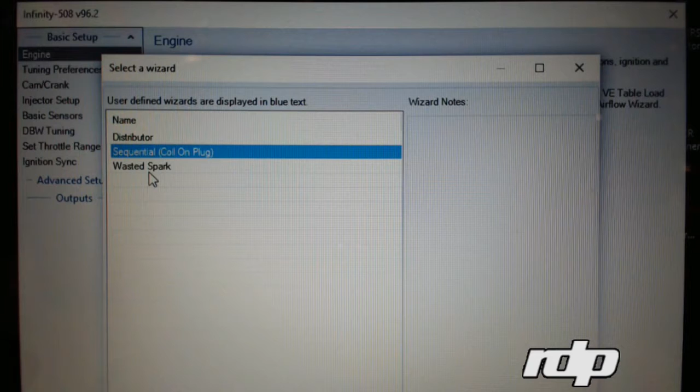And wasted spark, which is like your 525 Mercruiser. It has 4 coil towers with two pins on each one. So basically, one coil fires 2 cylinders. So you can make that choice right there simply through the computer.

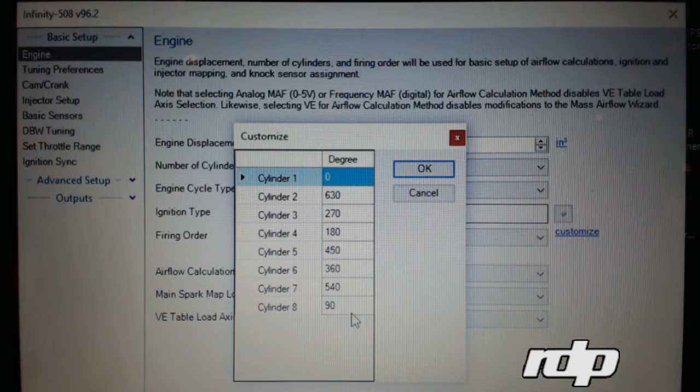Moving right along into the firing order, you can pull down the drop screen menu here and you can choose several different firing orders. And of course, if you wanted to, you can customize your own firing order by simply going to the cylinder and setting the degrees in which they fire for an 8-cylinder. We've pulled up an 8-cylinder basic map if I didn't explain that before.

So moving right along to airflow calculations, a lot of people use volumetric efficiency, and there's several other options here, but most of the time new users will use the VE type tuning, which makes it easier and simple to follow. When you go into the main spark map and load axis, a lot of people use MAP, which is load, and they use it in kPa.

Some people will flip to barometric pressure if they're used to PSI and vacuum. A lot of the other brands only allow the kPa and don't use barometric pressure. This one gives you a little bit more of options for that, and some of the other brands do as well. If you use the VE table load axis selection, you can basically change any of the axes on any of the lines in any of the maps by simply choosing your choice of how to tune.

Now, if this is your first time, I recommend just using kPa on here and kPa on here for both your load and your VE. That just keeps everything in order for you to get a basic understanding of how to tune your engine.

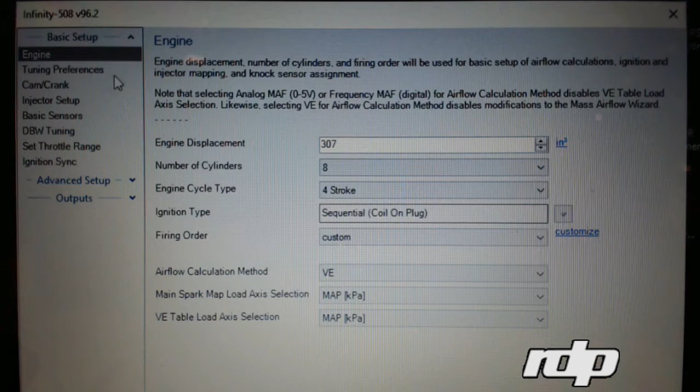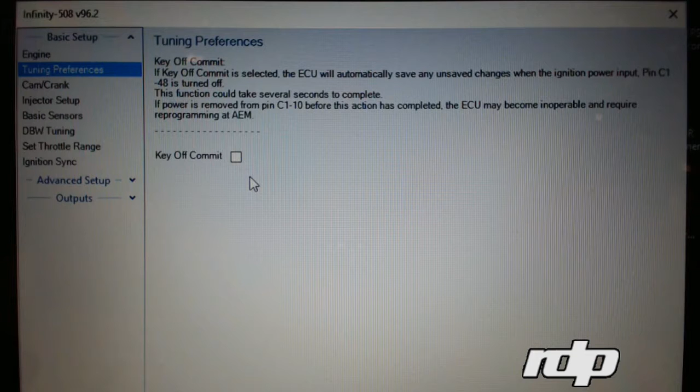Alright, so we're going to go back over into the next step here, which is tuning preferences. This basically says when you turn the engine off, do you want it to upload your changes? I usually leave this checked off. I want to save it and upload it at will. The only thing good about this, if you check this box, is if for some reason you stall the engine or something and you didn't save it on your computer and the power goes bad all at once, it might be an option for you to check, but not too big of a deal there.

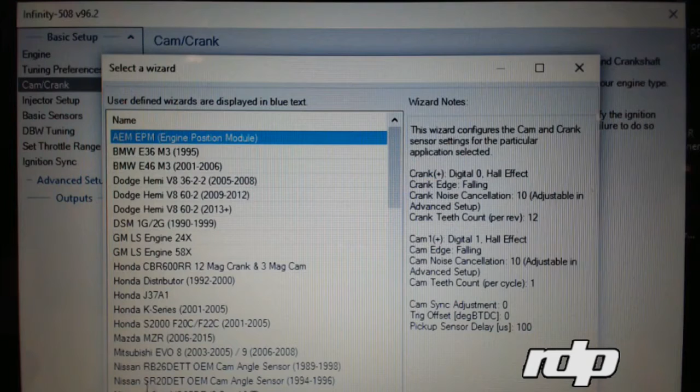But going into the cam and crank, this is your ignition setup. So if you go to show details, you have a lot of options here. So for example, if you have the EPM unit, which is the AEM, it replaces the distributor and has a 24x signal in it, then you simply choose this. But if you look, there's so many options from BMW to Dodge to GM to Honda to Mazda, and it just goes down a huge list. All the strategies in here are already figured out for you.

So for example, if you wanted a 60-2 similar to an LS pattern, you can go over here and you can verify that your sensors and everything is set up. It says here 60-2, missing teeth. It gives you all the specifications so you can line up your wheel on your crankshaft. But there's so many options here. You just have to make sure you know your cam and crank signal.

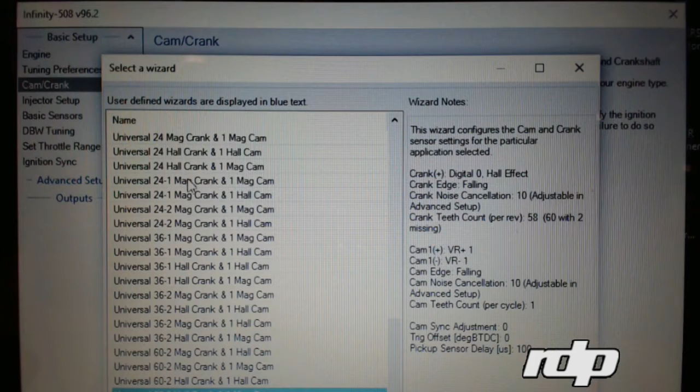And if you know your cam and crank signal and where it's located, you can get it real close by setting the basic cam and crank signal and then basically show the details, and you'll be able to set it up so the computer can see where your trigger wheels are set up. Now if you have a regular distributor, obviously you just choose like a mag trigger if it's a locked out MSD. So there's all kinds of options to set that up in this wizard area here.

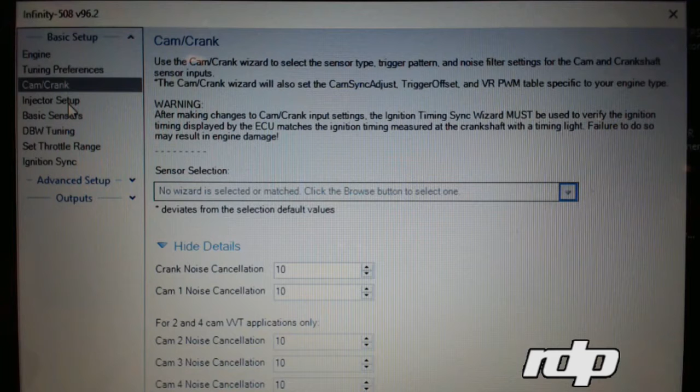Alright, so always stay simple with that. Don't go overboard. Just find out from your trigger manufacturer how many teeth you have, whether it's a VR signal or a mag signal or whatever it is, and then it'll be very self-explanatory there.

Alright, so when you go into the injectors, for example, it says primary fuel pressure reference. So that means, do you have a fuel pressure regulator with a hose going to the manifold, or do you have an open hose going to just atmospheric pressure? So the computer wants to know basically if your fuel pressure is static, say at 50 pounds, or is it going to be moving around based on vacuum, which changes the way the injectors pulse.

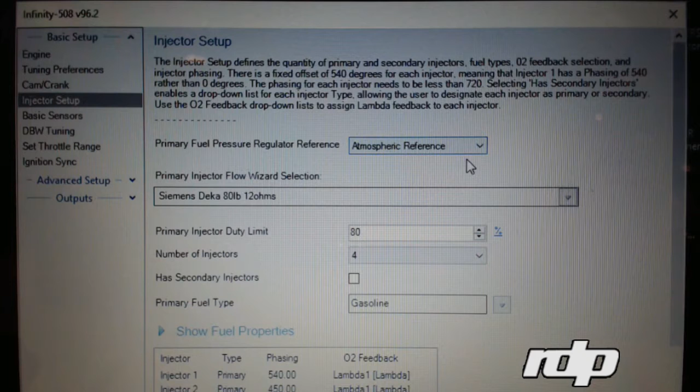This actually has the ability to calculate based on vacuum how much pressure is going to change based on a fixed position there in the ECU. So it actually calculates the richness and the leanness and compensates into the VE table.

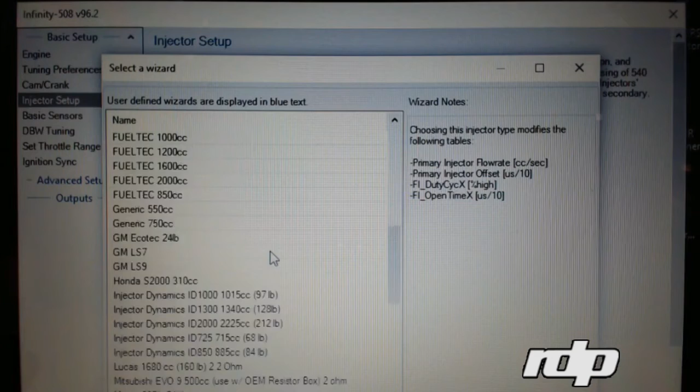All right, so if you look here, primary injector flow, so you can pick your fuel injector. Again, when you go to your receipt book of where you bought your fuel injectors, you can simply go and find out, okay, I bought a, let's just pick one, all right? Let's just say I picked an Injector Dynamics 84-pound injector. When you put that in there, it basically populates everything that the computer needs to know about that injector, and it tells it what its performance is. And you can look and see some of that information here.

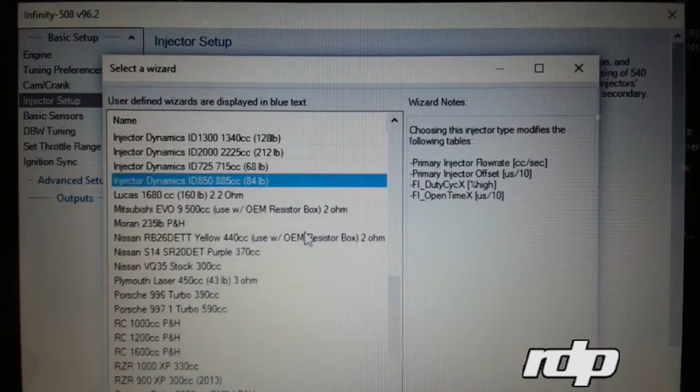And if you don't have one, then I recommend picking one that is as close to what you have spec-wise as possible. Talk to your manufacturer, and you can compare some of these brands with those and get it real close. Obviously, you'll be fine-tuning it in your engine when you get ready to fire it up. You'll be adjusting for that.

The other thing too is, this is your primary injector duty limit right here. What this means is no matter what, you'll be maxed out at 80% of your fuel injector's capability. It's a good rule of thumb to make your maximum at 80%, because if you go to 100%, sometimes the injectors go static, and when the injectors go static, it creates problems and they just start flooding the engine and you don't know what's happening.

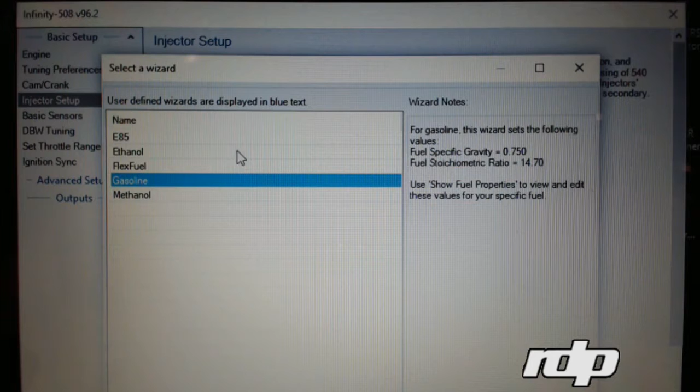All right, so this is the number of injectors. So this one says 4. Obviously, if you have 8 injectors, you put 8. Primary fuel type is gasoline. Now, if you want to run flex fuel, E85, methanol, it tells you here the difference in the stoichiometric ratio and the specific gravities for each one to make sure that you're calculating the correct VE for the basic startup of the engine. Kind of a neat feature there.

The other thing is phasing. So if you look here, it says injector 1 primary phasing. It's telling you where in the engine firing order these things are phased in at. So this can all be manipulated later on in more of an advanced setup, but usually if you just pick a V8, it basically has this standard sequence of events of when the injector is opening. Now you can change that in the software while you're running it on the dyno. You can turn the injector cycle on early, late, and there's a lot of hidden horsepower there if you get to that level. But this is just a basic area here that shows you that.

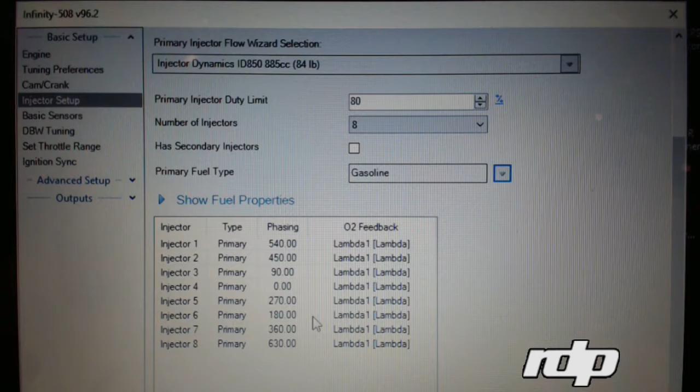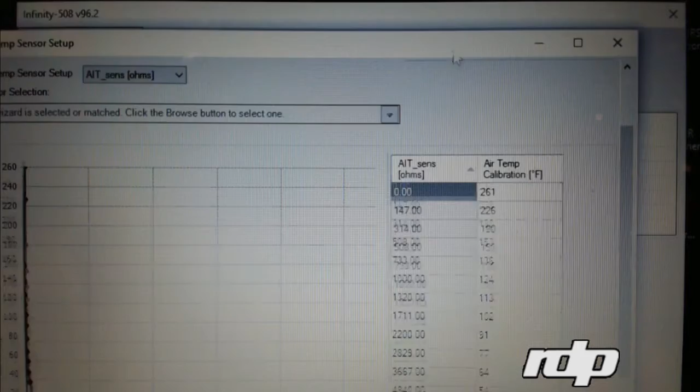All right, so moving into basic sensors. So what you want to do is, again, you must go back to your receipt book and say, okay, what air temperature sensor do I have? So you double click on that and you basically look here and it gives you a graph of how the sensor works. So let me move this up a little bit. You see the graph? So it's telling you how that sensor's set up, and these numbers here are basically each position.

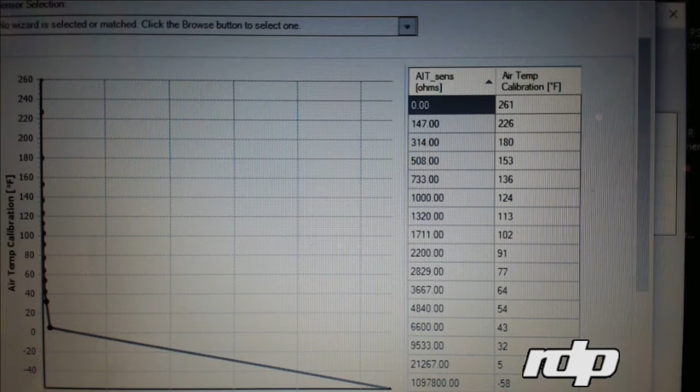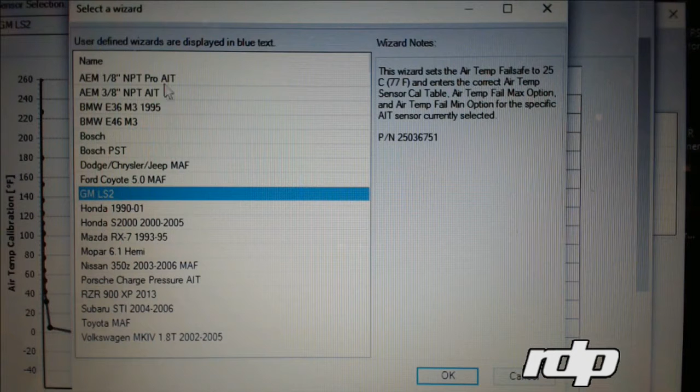So if you pick like an air temperature sensor from GM or AEM or whoever makes it, there's a drop down menu again. So say you have a Toyota sensor, it's got the information, or the LS2 GM, you double click on that and they have it populated already here, so you don't have to do anything. We already know the statistics of that sensor. Especially if you use the AEM brand, it shows this curve and all the numbers are here, and that's all you have to do, and then simply close that part of it and then go to the coolant temperature sensor.

When you go to the coolant temperature sensor, it's the same type of thing. You just literally pick what it is that you want, and you can adjust these numbers and you can change the curves around to make it suitable for your needs for each sensor. Same thing with the map sensor. You double click on that and you can pick what type you're using.

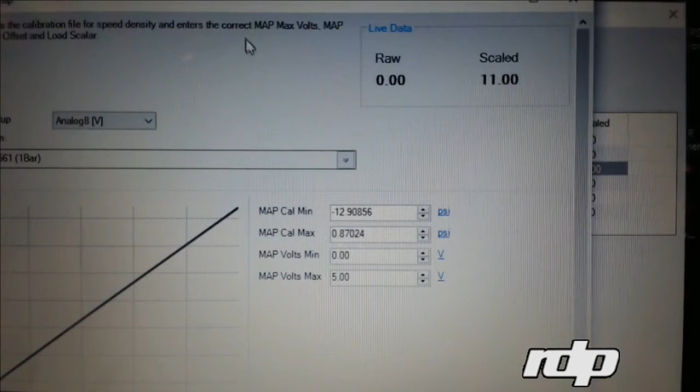So this one is very important. This one is set up for a GM single bar map sensor based on its part number right here. And if you just hold the mouse right there, it's basically telling you what it is. It says it sets the calibration for the maps and it gives you the spec. Now, you might have a GM 1 bar that's something else. There's another one here. There's another one here.

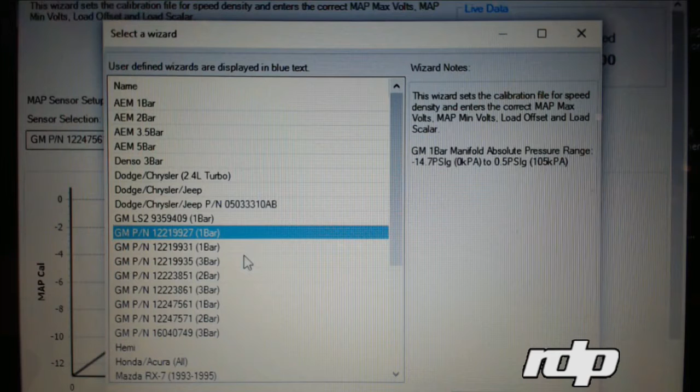There's several of them. A lot of people think that the map sensors are all the same, and they're not. They're definitely different. A lot of the GM sensors, they can be plastic and look the same, but they actually have a different curve. So it's really important to look, when you double click on this, you need to check this curve out and make sure these numbers are correct for your application.

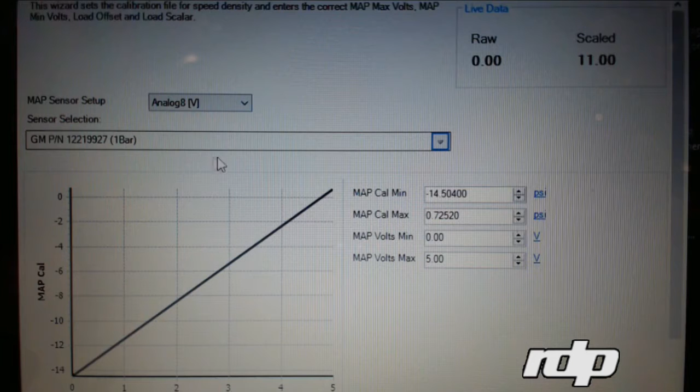So don't just assume because it's a plastic sensor and it's a 1 bar that it's going to act the same. A lot of times people change sensors on a stock motor and they go to Napa and they buy a single bar map sensor from some Buick and they think it's going to work on their motor and they end up exploding it because at 3,000 RPM it's a 1/4 of a volt different input to the computer and it runs lean there. So be real careful with that. It's really important to get this set up properly.

Alright, so let's get out of there. Let's see. We're going to go back into this tuner here. We gotta make a couple adjustments here. Alright, so what I'm going to do is reopen a different part of this software so we can see it a little bit better. And let me see if I can show this to you.

So again, when you're looking at certain things on the fuel, basically your VE table, like this is in negative vacuum and positive. It's in map PSI. So if you change this to KPA in the wizard, this all becomes KPA. So you have to be familiar. Like if you're a new EFI user, you may understand that this is 0 and 1 pound of boost, 3 pound of boost, 4 pound of boost, whatever. Where if it's KPA, you may not understand it. So there's a lot of ways to play with it.

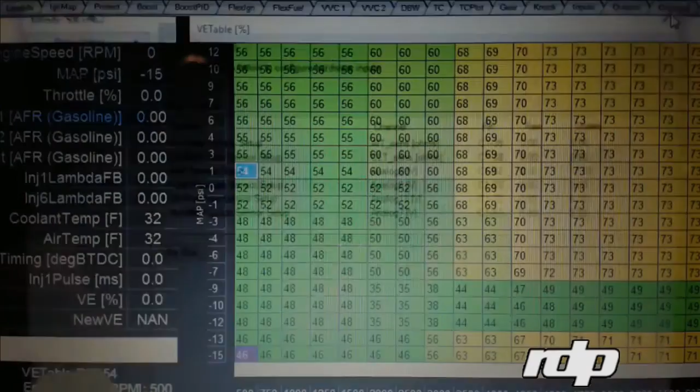But basically your idle range, and when you fire it up, if it's lean or rich, you can simply highlight a section like this and then simply move the map up and down. So I kind of wanted you to see where that wizard applies for setting up the sensors and the injectors. So I hope you understand that. When you set up the injectors and all this stuff here, if you click out of this, what I was trying to show you is this section here is where

your fuel is. And if this section is where your fuel is and you're running and idling, you can simply just hit the minus or plus button till you get the engine running. And what that does is it manipulates that injector pulse. And once you manipulate the injector pulse, you can home in on that air-fuel ratio for your injectors. But try to set all this up right.

All right, going back to the fuel pressure sensor. A lot of people don't run these, but we do, and we like to be able to know what the fuel pressure is doing. So you can minimize this, and again, you can put your calibration minimum, maximum, or for the first time users, you can just pick a sensor. This one's set up for an AEM 100 PSI sensor. Comes with a lot of Whipple kits and a lot of supercharger kits out there, and you have the ability to change it to whatever you want.

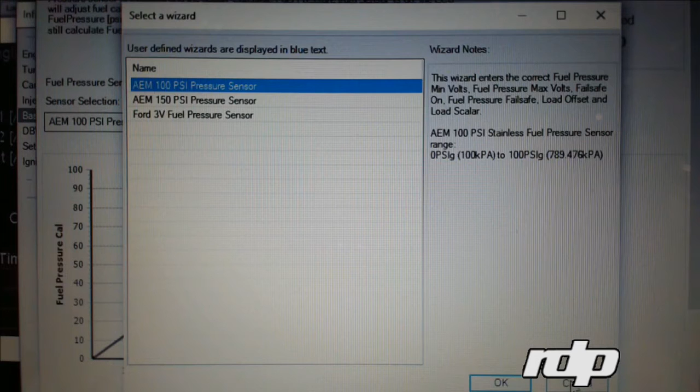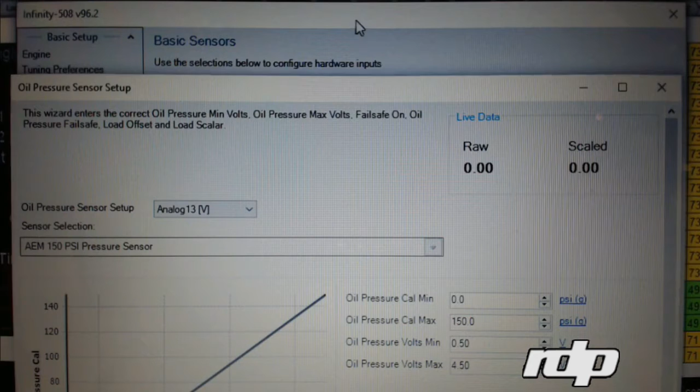Or if you don't see one and you know what these specs are, you can basically call it an AEM 100 PSI, but it can be anything. So the ability to change it on the fly and do whatever you want is a big benefit. So that's kind of a neat feature there. Same thing with the oil pressure sensor. You can take the oil pressure sensors and move them around and do the same type of thing. This one's set up in a certain range. So that's pretty basic.

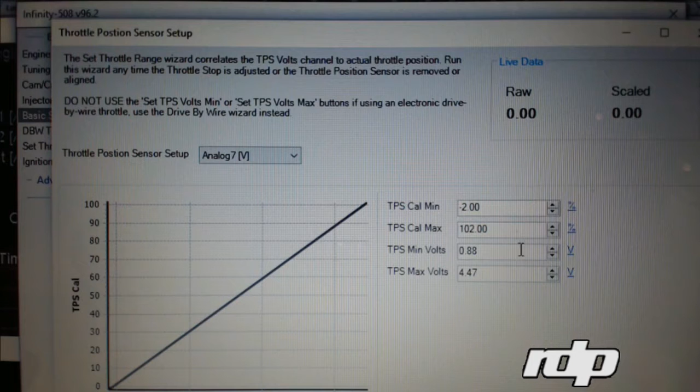When you set up and key on, you need to see what the voltage is when the thing's at idle, about where you think the throttle position would be. That way you can adjust this if need be. But usually this is a good starting point that the wizards default to in most EFI programs.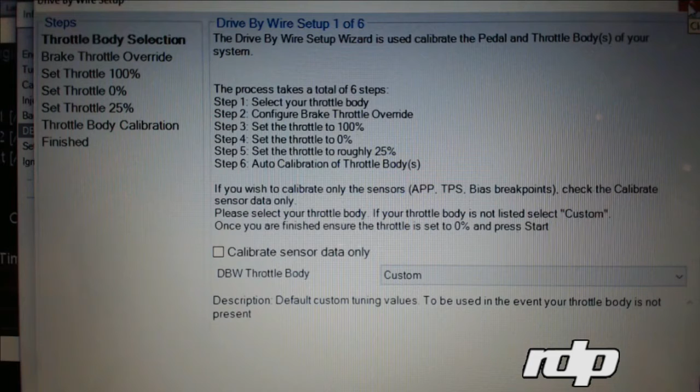All right, so this is for drive-by-wire tuning. Most of you guys are not using this yet, but basically this sets up the drive-by-wire calibrations in the engine here. So if you have no cable and just a drive-by-wire throttle body, you can go through each one of these setups here to make sure that when you start the engine it knows what it's trying to control as far as the drive-by-wire setup.

Alright, so if you look here, a lot of the newer EFI systems have this. It's a set throttle range. So when your engine's sitting in your boat or car or sand car or whatever it is, and you want to set minimum and maximum TPS voltage, you basically come into here, key your engine on, hit this button without the throttle depressed at all, and then it'll prompt you to go all the way to wide open and then set the maximum. When you do this, you'll see these numbers change here.

And what it's doing is it's saying, okay, we know this is the minimum throttle, we know this is the maximum throttle, and now this is our fixed range based on this person's vehicle, ECU, harness, and software. So it's very important before you try to start this machine that you set this up in the wizard with the key on, and when you're connected live to the ECU. It lets the computer know what range it's going to live in.

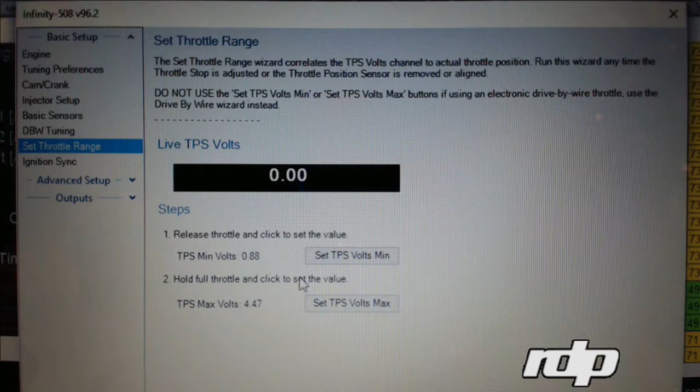So some of the guys forget to do this, and then they go do all this tuning and find out that they're way out of range and they got to start over. So please go through these wizards and basic setups in any of the software before you go to start the engine. Alright, the other one you got to know about is ignition sync.

So say you get the engine up and running. When you get the engine up and running, you want to do what's called an ignition sync. So you want to check this box, and this one says 15 degrees. What that means is that it's going to hold the ignition at 15 degrees. So say you're up and running and the air-fuel ratio is pretty close and you have no leaks and everything's cool and safe. You basically take the timing light and it should be at 15 degrees at any RPM.

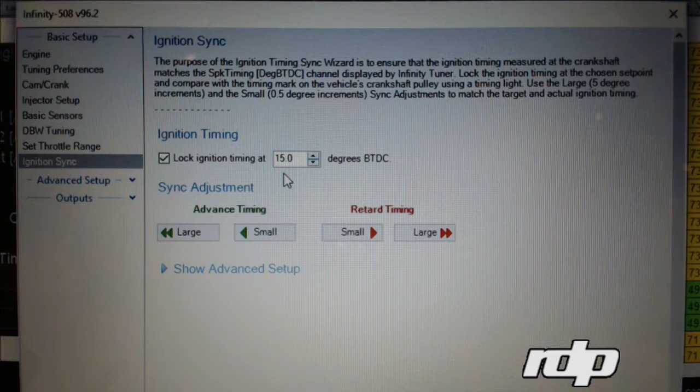It locks that distributor down. So at idle it should be at 15 degrees, and at 3500 it should be at 15 degrees. That way you can ensure that you're synchronized with the computer, with this number of 15 matching the timing light. It's really important that you synchronize this before you do any continual tuning. So get it up and running, put this in timing mode, check the timing and make your adjustments on any distributor or cam teeth or anything.

So if you go here, for example, say you have a 60-2 wheel, you can change the offset right here in increments to change the timing. Because you can't adjust the timing on a reluctor wheel on the crankshaft, but you can change the offset right here. So in this little area here, while the engine's up and running and idling, you can synchronize the timing.

And if it's fixed position, then you have to do it here by telling the computer that, hey, I'm off X amount of degrees, so I need to offset. Say you're at 18 degrees, you may want to offset this number up or down to get it in sync. Once you're done with that, uncheck the box and save everything.

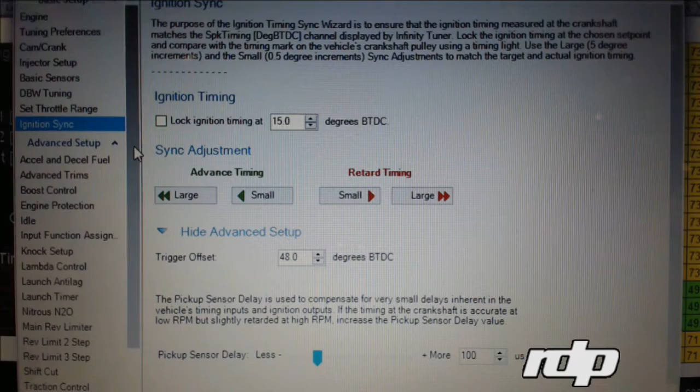That way you can make sure that all this adjustment that you're doing is ready to go and set up for your next startup and final tuning. Alright, so now we're going to go into the advanced setup over here off to the left side. You can see it right about there. So we did the ignition sync.

Now this is your acceleration and deceleration. Now most of this stuff is more advanced, and obviously we'll go into more depth about it at a later date. But basically in the accel decel fuel, it says here that you're going to be able to set your acceleration fuel by the throttle rate and the engine speed. But again, you can change it from coolant temperature, you can change it from the rate of change, you can change it from what the load is. So there's a lot of ways to adjust this.

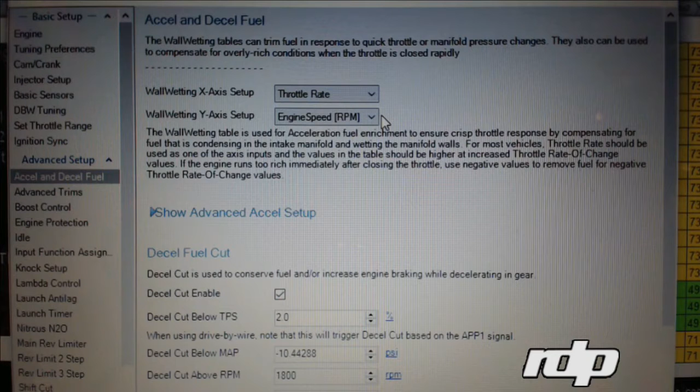I always think that the best way to start out on a new tune is throttle rate and engine speed. That way you can just basically feel out what the engine wants and get it crisp and clean accelerating there, and then move into any further tuning in the layouts.

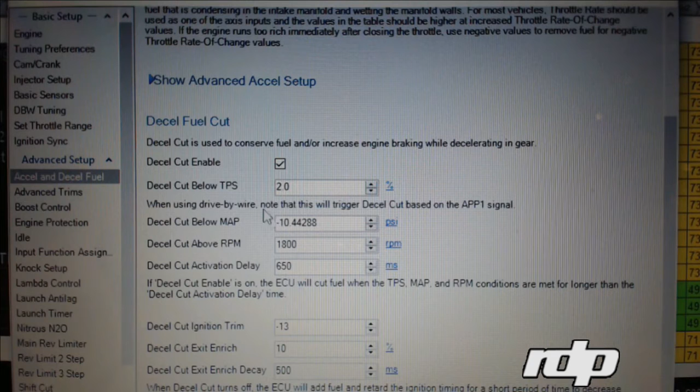And then over here you get into deceleration cut. So when you decelerate, this means that this box is checked, and when you're below 2.0% of throttle position, it's going to maybe cut fuel. So you could turn all this on or off. I always recommend leaving these at default in the beginning, and then once you think you have a pretty good tune on it, then you go in here and do what's called the advanced tuning.

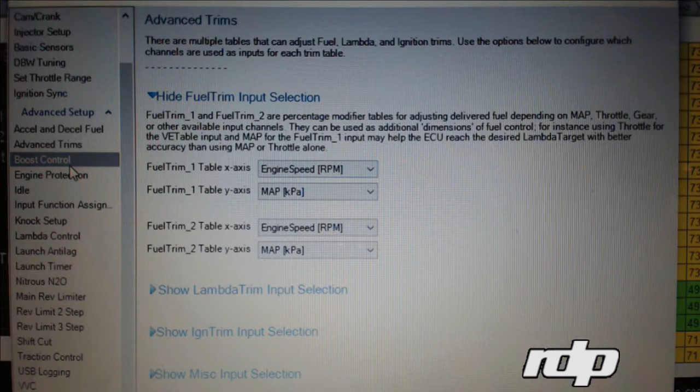So if you look at advanced trims, these get into all kinds of in-depth parameters that we will show you at a later date. This is more of the advanced session here with these drop-down menus, but I'll skip around and go to the basics for firing it up. Most of the guys aren't running turbos in the beginning here, but this is all your boost control. This is a hot one.

This is engine protection. So enable MIL output. That allows you to have a ground output to a light or your MerCruiser buzzer or whatever's existing on your boat. So you can check this box and have it work the same way. And then you can set maximum boost, throttle position, temperatures, lean, rich, however you want to input any kind of alarm into that output. You can do it right here.

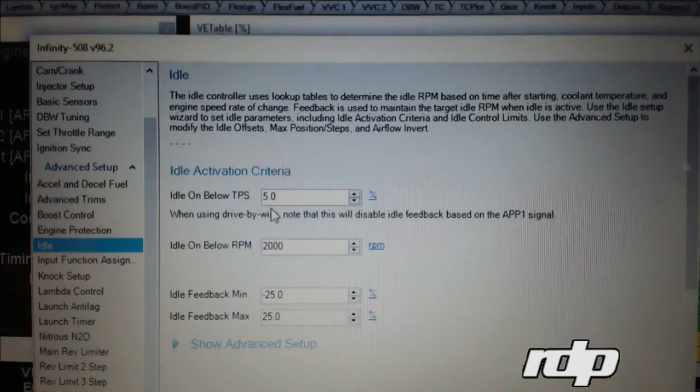When you look at some of these other spots here, it shows you like idle on below TPS. For example, if your throttle position is below 5%, it basically tells the computer you're trying to idle, so put everything into the 850 RPM range or whatever it is.

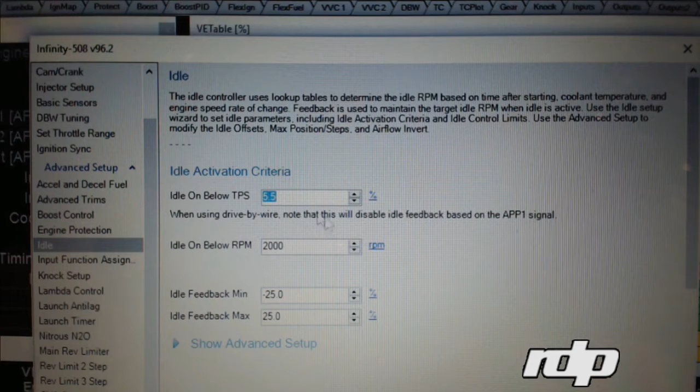So these are the type of things that you can manipulate. Say your engine wants 5% of throttle just to stay running, if it's like a 700 cubic inch something or other. So you've got to change this and move the number up to like 6 or 8%. This will happen after you get up and running. You'll see that you're not able to adjust too much fuel, and then you'll have to come back into the wizard and do more advanced things.

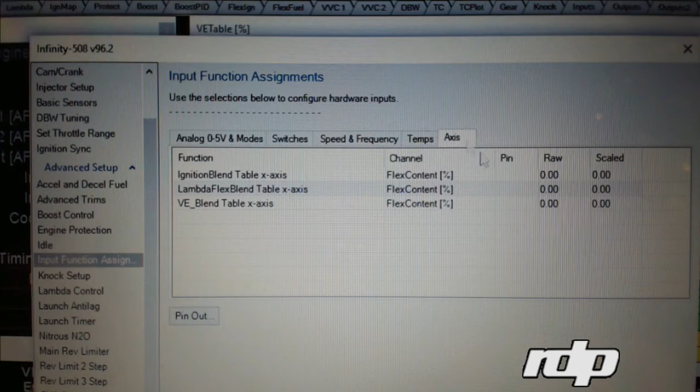The input functions, all these things are whatever you want to input into the ECU for any kind of change or modifications. There's switches here, there's speed and frequency, temperatures, and axis for tuning. So these are all custom tunable inputs, and there's also outputs.

This one here is pretty nice to put on, but I don't put this on until after it's tuned, because you don't want your knock feedback to start manipulating what you're doing on your base map. You've got to get the base map set up. So it's really important that you get the base map set up on these EFIs, and don't turn all these extra functions on until you get the basic engine timed, running crisp, revving crisp, idling good, or as good as you can, and have a stable engine that'll actually start and run and idle.

And once you get that going without your O2 feedback, in other words, have the oxygen sensor feed back the air-fuel ratio to you, but don't let it take over and make any adjustments. Do it open loop so you can get a good baseline, so if any of the sensors fail, the engine runs good.

That way it's not all of a sudden a disaster if it goes into a limp mode. So part of the thing you've got to do is understand this section here. This is all set up and basically turned on for the knock sensors, but I have it unchecked here until I'm done doing the base tune. Once I do the base tune, then I can turn this on and then run it and see whether or not you have to change the sensitivity of the sensor and what you want it to do.

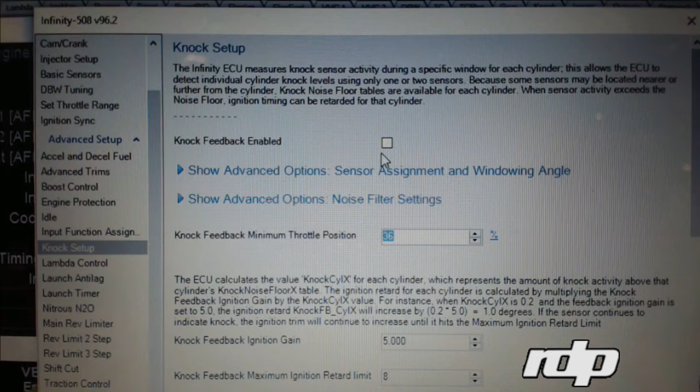And if you have this box checked when you're doing your basic tuning, you could be knocking and you keep advancing the timing, and when everything's right, all of a sudden you're at 45, 50 degrees of timing because this thing was pulling timing out trying to help you, and now it's not. So don't make the mistake of having this stuff on when you're doing your first initial setup. It's a bad practice. Make sure you get it all base tuned and running, and then turn this on and the lambda feedback and all that.

So here's one we can talk about for hours, but this is the lambda control. This is your air fuel, oxygen sensor setup. This one says it's installed. This one says it's turned on. And this means how much will it possibly correct no matter what I do? So if I'm running on the dyno and it needs more fuel, it's only going to add 15% of fuel no matter what. So if I'm 25% off, I'm going to be 10% lean no matter what, because I only have 15% of fuel here.

The other thing we do here is we set the minimum speed for the sensor to even do anything. In a boat, you've got to keep this up around 1500 RPM or it'll lie to you at idle. A lot of times you get false readings until you're under load and on plane at about 1800 RPM in a boat. So a lot of times we set this to 2000 RPM before it does anything. You'll see that in your boat, if you have a sensor, it'll sometimes act like that.

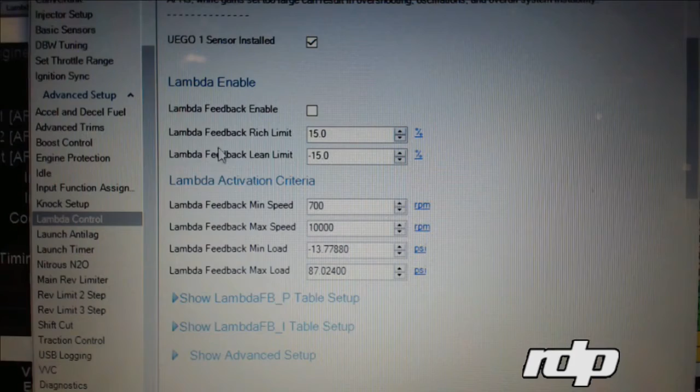Alright, so these are more advanced features down here we can go into later, but having this on or off is basically right here. You just turn this sensor off, or you leave this one on to let it know that it's there. You leave the feedback off, but when you're tuning this engine, if you look down here, it'll tell you when you're running the engine that it's running 12.5 or 13, rich or lean, but it's not going to correct or do anything. This feedback number is not going to help you.

So you can simply say, okay, we're running lean right here. Okay, so then you simply hit plus. See how the numbers are going up? All I'm doing is adding fuel, and you'll watch over here that the number from say 13.0 will come down to 12.5.

And once you look at that, you can say, okay, look, I'm at 61 now. To make this right, I want to make all of this richer, right? So you simply can highlight it and you can hit plus like that, make it 62, 63, and now it's smoother, right? So before you smooth all this in the map, there's functions that we'll go into, you can right click, right? And then see where it says down here, you can't see it, but it says smooth. So you just hit the smooth 4-cell button and it automatically smooths this section out right here.

So there's all kinds of trick things you can do, but basically say you start it up and you're idling in this range and it's rich or lean. Even though the oxygen sensor is not going to do anything, because we don't like to believe them at idle on a boat header, you can simply go up and down and you can watch the power or torque on a dyno move. You could be going one way or the other. You'll see the air-fuel ratio up here changing.

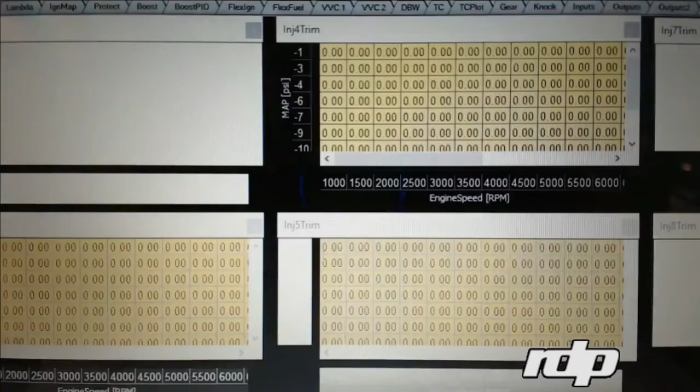I mean, you can go into all kinds of things. You can go to each cylinder. This is per cylinder offset. So it's unlimited what you can do, but we'll go over that more in the advanced session. But we wanted you to see and understand how some of this applies to that. All right, so that's the lambda function there.

And then launch control and anti-lag. You guys in the boat market don't use that, but some of the sand cars do use it, and some of the hot rods use it. So you can have a launch retard for the timing available, so you can hold the throttle all the way down. All kinds of trick things you can do with this function. You can do a launch timer, which is this one.

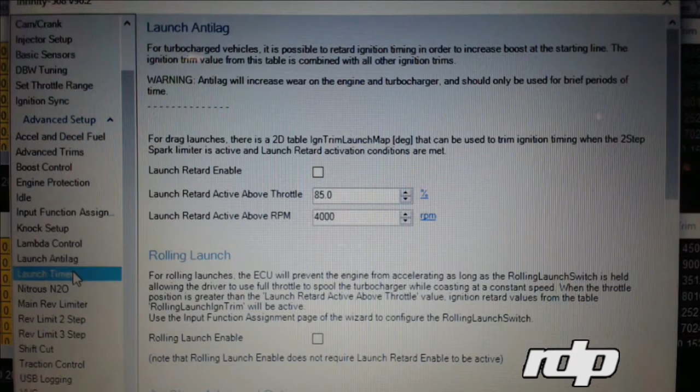Nitrous inputs. So a lot of times we use these nitrous inputs for methanol injection. So just because it says nitrous, you can make this control anything. So basically, when this computer sees an input from some kind of a grounded wire, it adds X amount of fuel, and you can go simply to one of these tables behind the screen here and add fuel based on you putting methanol, nitrous, cryogenic, intercooling, whatever you're doing to upgrade your engine. So again, these are features that you'll just leave off in the basic function of starting your engine. But you got to kind of scroll through each one.

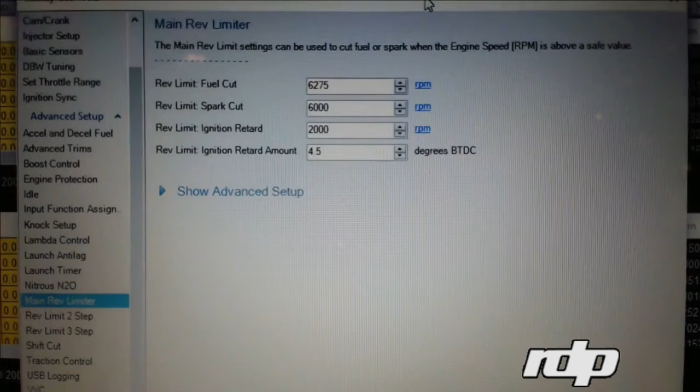So this is one that's popular that we get calls every day about. Can you move my rev limiter up? Can you change my rev limiter? I want it 200 RPM higher, 200 RPM lower. Well, if you have this system, it's real simple. You have a fuel cut and a spark cut, right? So the reason there's both is so you don't overshoot. I'm sure there's a lot of you watching that have broken engines because the outdrive broke and your engine overshot.

Well, that's because maybe you only have a spark cut. If you have a spark and a fuel cut, you have less chance of the thing overshooting by 1,000 RPM. You know, if you're running 5,800 RPM and you break into neutral, it's going to definitely overshoot 6,200, but you might only get to 64 instead of 74 because they'll overshoot that far.

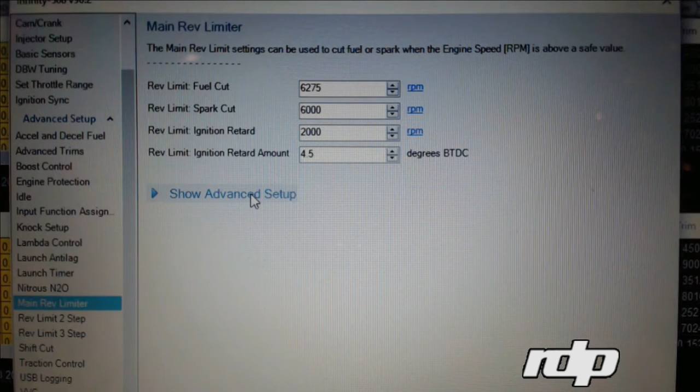So the other thing you can do is set a retard. So when you get close to the maximum RPM, say of 6,000, it starts pulling the timing away just a little bit to make that hit a little bit softer on the engine if you do hit the rev limiter. So there's a lot of stuff here that you can do, and then if you hit the advanced function, you can really home in on making your rev control really smart and how it reacts. There's all kinds of advanced features down here that you'll read about later, again, after your basic setup.

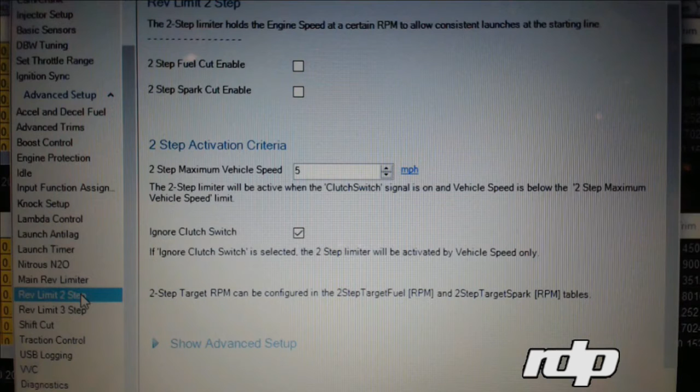You have a two-step rev limiter, so you can do things for different inputs. That's pretty basic. There's a third step you can add. Shift cut. This can come in handy for you number 6 drive guys out there or anything with a heavy load. When you shift the engine, you can make it do several things right here. You know, like you can retard the timing for a split second. You can ramp things. You can have it do anything here. You can have it fuel cut. There's all kinds of things you can choose for shifting.

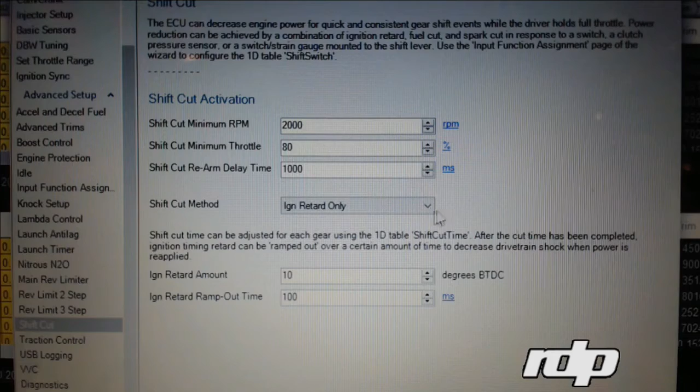Some guys like to idle around 1,200 RPM, but they can't shift. So if you want to idle at 1,200 RPM, you got to do a fuel cut input, and then you can pull this menu back and go into some of these special options that are all throughout this tuning, and you can see that you can choose all kinds of different things to play with when you're trying to do any of that type of setup for your engine. So again, having that control and the ability is a nice option to have.

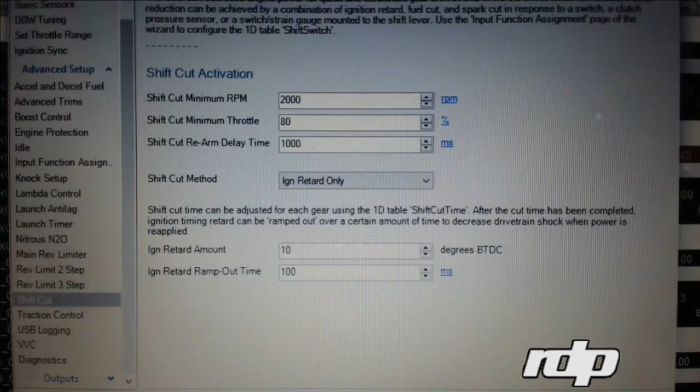All right, so traction control comes in good on like a Mendeola deal in a sand car if you want to, or some kind of traction control transmission that you might have, whether it's custom or aftermarket with a computer controlled clutch. There's all kinds of options. A lot of the boat guys don't use this, but the function is there.

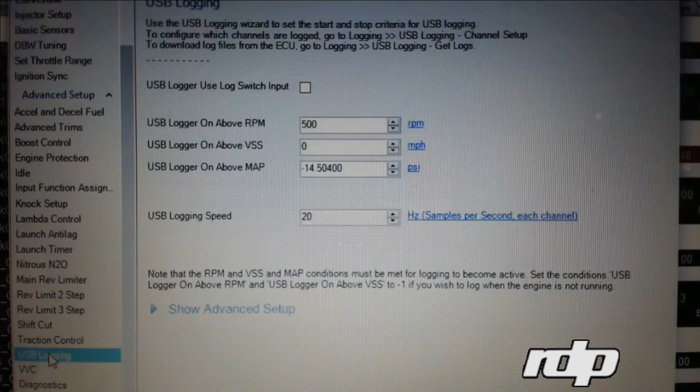When you go into USB logging, this thing can data log for eons. I mean, you can plug in a USB stick right into the ECU, and it's pretty simple. Like a lot of people call us and they say, "Well, how long can I log for? My ECU overwrites after 20 minutes." Well, on this ECU that AEM has, there's a couple ports here, and one of them is a USB port, and you could plug it into an external terabyte hard drive if you want it in your boat, or some of the really small thumb drives that hold a lot of information. So you may consider that.

Going back to this, it just says how many samples per second do you want to data log. And then basically you can have it turn on automatically based on this or that, or all kinds of options. And then again, you can always click advanced and scroll down for miles.

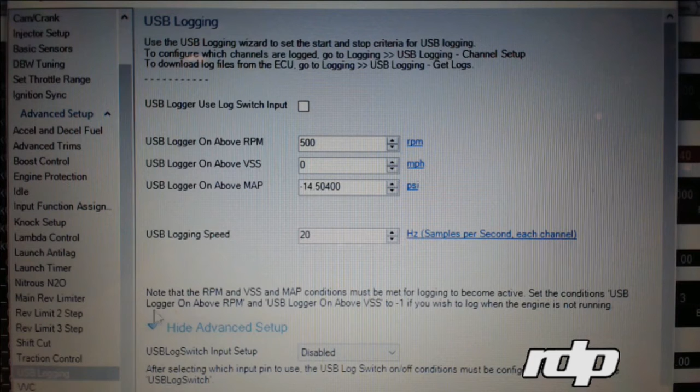Okay. So a lot of the marine guys, they don't use variable valve timing, but a lot of the new engines out there that have 4 cams do have variable valve timing. And if they have phasers on them, we can control them. So if you have phasers on a 4-valve motor, some of Mercury's products have phasers, and some of the other aftermarket engine companies have phasers. I know BMW uses a lot of them. You can modify the phasers so you can seek the most horsepower out of your cam phasing.

So basically this manipulates where the cam position is in the rotation of the engine. It's a pretty advanced deal right here, because if you screw this up, you can have valve contact with pistons. So you got to kind of know what you're doing there for sure, but the option is here.

So the thing to have a look at is your Diagnostics tab. If you look through here, there's all kinds of things you can set: crank RPM, battery filter, shutdown time, speed.

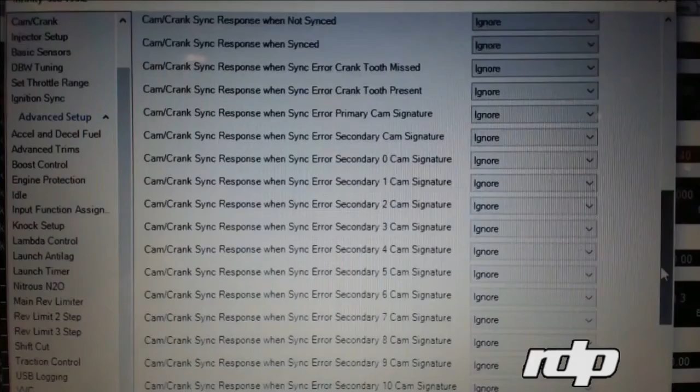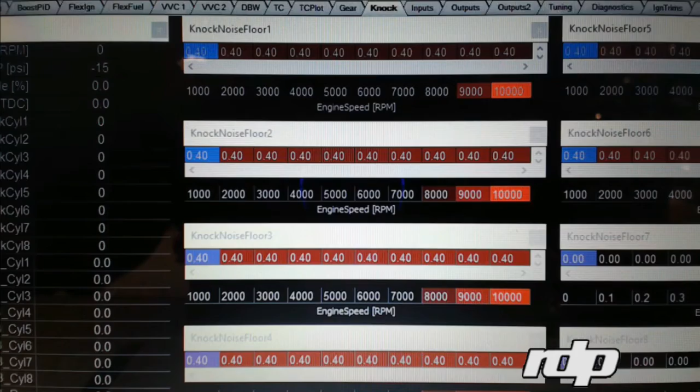You'll have to read about this, but again, don't mess with any of this stuff until you start the engine up and get a base map on it, because there's a million options there, and we don't want you to have any trouble. So one thing I just wanted to give you a quick idea here. So when you have the timing set up, I showed you the fuel.

But for example, say you're at wide open throttle and you're in this range, and you're watching the dyno, and all of a sudden you're saying, okay, I'm making 1,000 horsepower now. That's pretty good, but let's see if we can make more. Our air-fuel ratio, which I showed you earlier, is already set and done. You can simply add a little bit of timing and see if the power number goes up. You may not get any more power. You may find that if you go from 35 down to 32 or lower, you're making the same power with less chance of having detonation or knocking.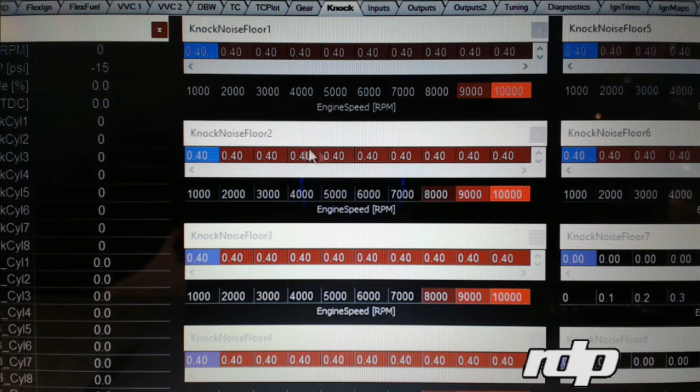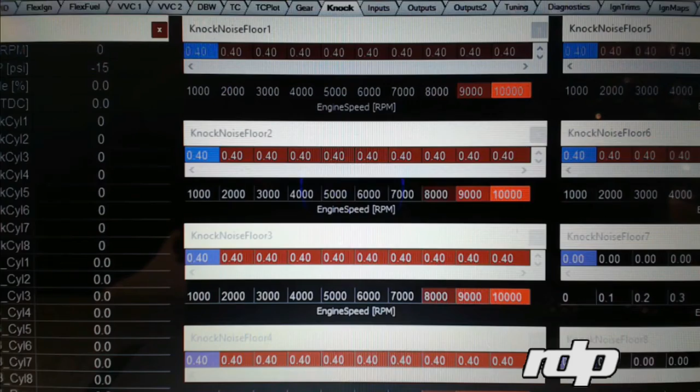So once you get to this level, you want to be monitoring your knock, because you can see it in this area here if you have it turned on, or you can simply click the knock control and snap one of these screens out. See where it's blue, it says knock noise floor. This basically will show you where you're at in the range and whether this engine is knocking or not while you're doing the test. You may find that the engine knocks at a lower RPM or a higher RPM, but basically this is where you find all the power.

A lot of guys say, what's good about EFI? Well, you can change the timing here. Say it's happy at 33 here, but down here under a lighter load, it needs to be at 34, because at that load, the horsepower is down. You can't do that with a mechanical anything, no matter what. You can't change those things in those ranges with all the different profiles.

You can change it from here to there and curve it, but this is at wide open up here and this is at cruising speed. Well, if you're still at this RPM with a lighter load, say you're not climbing a hill, you may want the timing advanced. You can't do that unless you have computer control. And you might find out that up here the thing wants to be at 31 degrees. So now it's at 31 degrees and it's making max power up here at a lower amount of timing.

So again, you can't do that and find the horsepower unless you have EFI, because it's just not possible. You can't take a mechanical weight and change the load and have it come into here. Guys will dispute that up and down, but we do it every day and we see. But interestingly enough, you may do this for a different reason.

You may say, look, when I'm at 0 vacuum and cruising right in this range here, I want better fuel mileage. So you may put the timing at 26 degrees right there because you don't care how much power you have there. You know that this is the area you drive to the Pirates Cove or wherever you're going in Florida, to the Tiki Bar or down to the Keys. You know that this is your cruising range right here and that you want maximum fuel economy there.

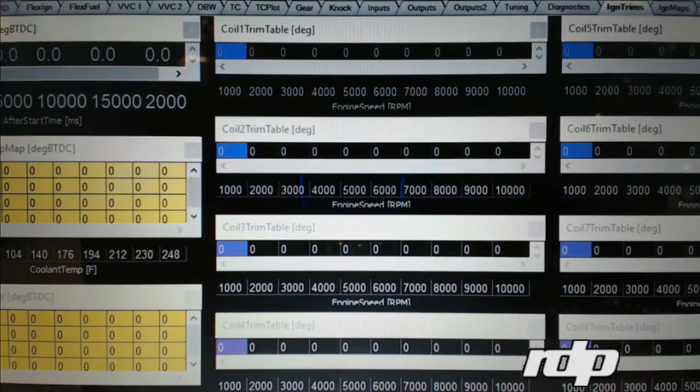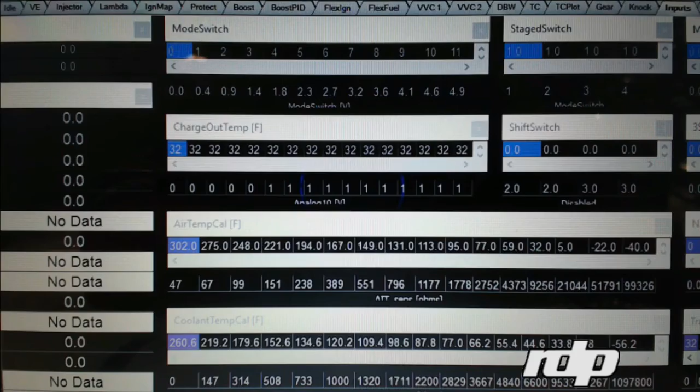But knowing this is good because you can take that information from this grid and copy it over to your timing, which is important. You know what I mean? So that way you can maximize your fuel. Now again, there's all kinds of adjustments on here that you may or may not use. A lot of this is confusing, right? But for the first time, I always tell people you want to concentrate on your VE table, which is your fuel, and you want to synchronize your timing and make sure your ignition map looks good.

You could come in here and set this thing up real simple. You can just come in here and go, okay, let's pretend we're a distributor. We want to idle at 15 degrees and at wide open throttle we want it to be 34 degrees, and then let's take this number here and properly interpolate it horizontally. Okay, now this is a distributor. This is a typical MSD distributor with a blue spacer and 2 light silver springs.

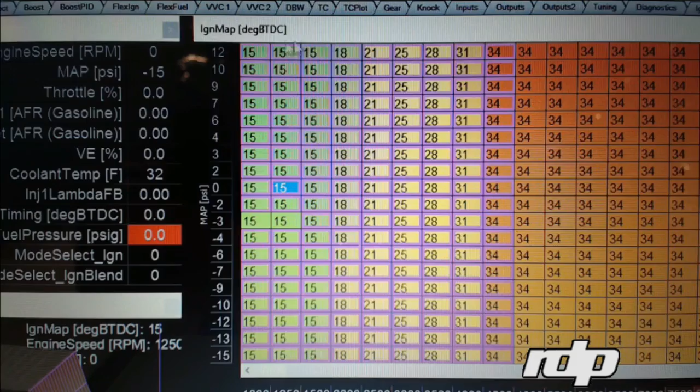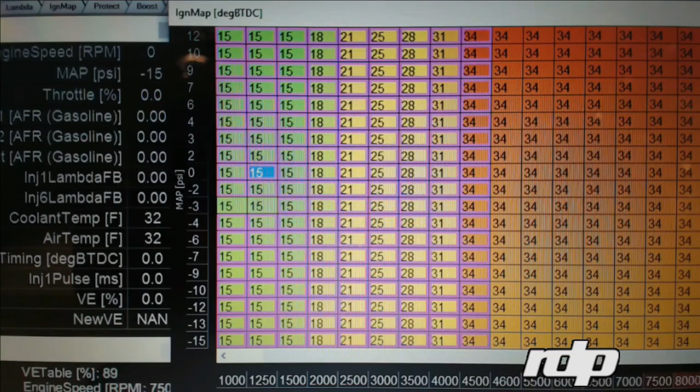Basically based on RPM, if you look down here, at 2500, right at about 4500, you're at full advance. Your idle range is 15. This is a good starting point for any engine. You're basically saying, okay, we're going to start it up and it's going to run like a carbureted deal right here, just to make sure that everything's cool. And you're going to come over to the fuel and say, okay, I have my fuel in this range here.

And this is my idle range. And then when you fill out the wizard with all the fuel numbers, it'll populate this, and like I said, you'll say, okay, this is where I'm idling, this area here. I'm going to move this up and down till it gets stable enough to set the timing, and then we're going to go on from there. So hopefully that gives you a little bit of an idea of how this thing thinks. Most of the brands think about the same way, depending on a few things.

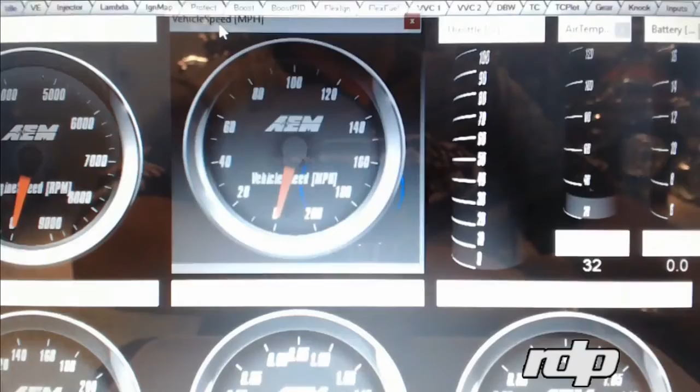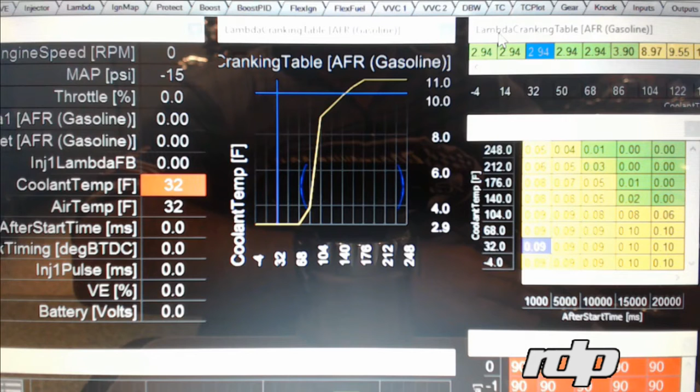And with the AEM, you have a gauge set here, so you can move around gauges, adjust different things and output different things. And the other thing is, if you want to start your engine, you can go over here and adjust all kinds of things. How much percentage of fuel you want, how you want it to start, where you want it to idle. All these numbers are adjustable. So if it's 32 degrees till it gets to 104 degrees, you could say, all right, I want this thing at 1211 RPM.

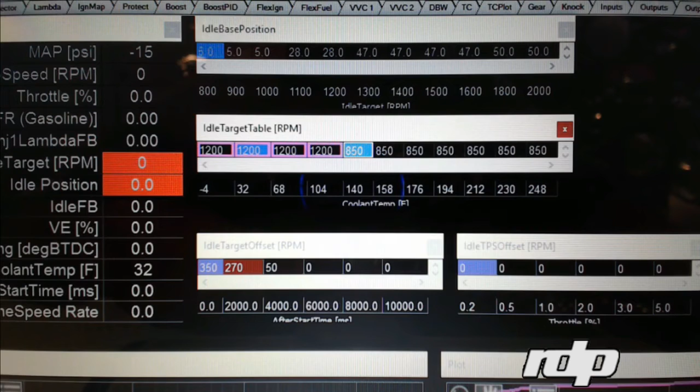And there you have it. As soon as it gets to 140 degrees, it's going to drop to 850 RPM. So it's pretty cool that you can adjust for any of that. What that basically does is adjust the timing and move the idle air motor around. It gives you the ability to do different things. So again, once you sort that out, you'll see that it makes sense. Now, once you turn the closed loop on, once you get your basic tune, you'll want to make sure before you start, you set this up to a safe parameter.

For example, this is a normally aspirated engine. At wide open, it's happy at 12.3 air-fuel ratio. Under light load, it likes to be in the idle range. This one's actually on at idle, and it's 13.5, which is on the lean side for a big normally aspirated marine engine. And then, as it goes down here in this range here, it's 12.9. Now, this is not correct because this is a lighter load.

So to correct this, you would say, look, the leanest I ever want this thing is 13.49, right? That's the leanest you'd want it under no load, right? And then as it gets richer at wide open throttle, you want it, say, at 12. Let's just call it 12.2. Let's make it real conservative, right?

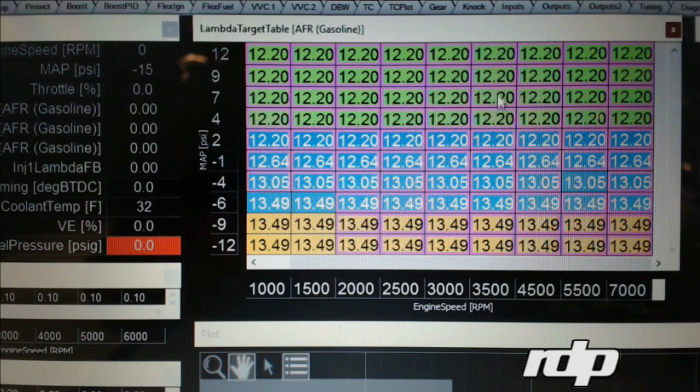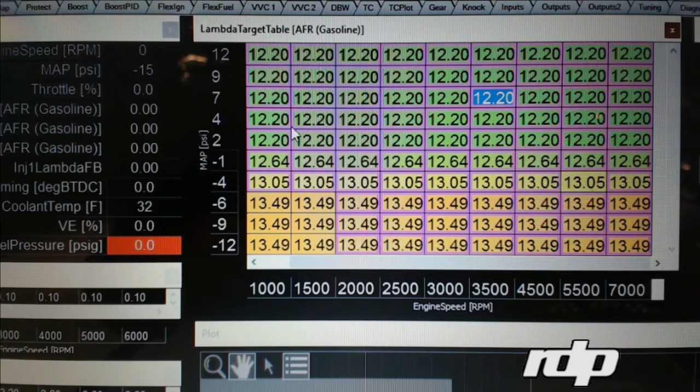So we have it at 12.2, and then you can simply highlight this grid, slide the mouse up, right click. You can't see it, but it says Interpolate Vertically, and what that does is that curves it to where basically it's going from lean slowly into a richer area. That'll keep you safe.

Now, once you set this, you can look where I was telling you on the VE table over here. You'll be able to look in this area here to see if your air-fuel ratio, basically how much is it adding? Is it adding that full 15% we talked about to keep it where you want it? And if it is, you can see it real time where it's happening. Like say it's flashing in this area. Say it's running really perfect on the dyno, but down here the feedback says, man, we're adding full 15%.

Well, in that case, you just simply come over here, highlight this section, and basically go up on the fuel, and you'll start to see in this area here that the feedback number comes down and the air-fuel meter here stays the same. But you want the feedback numbers to be like 0.01, 0.02 to 0. That means that if the sensor goes bad, it's only going to be 1 or 2% off.

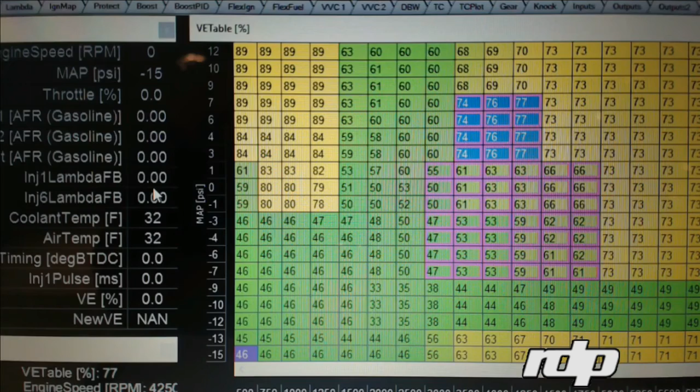A lot of guys tune the engine and they leave the sensor on, and when the sensor goes bad because lead kills them after a while, all of a sudden they're stuck. They can't run, their motor doesn't drive right, all kinds of weird things happen. So, it's really important to do it in steps. I can't begin to tell you, take the time to do this in steps.

It's really important to make sure that you know what injectors, what sensors you have, what mechanical items are on board, your fuel pressure, your regulator. If you follow the steps I just showed you, no matter what brand you choose, and you input the information, assuming the brand you choose has all the curves and corrections in it, some do, some don't, and you do all the basic things in order, and don't turn too many features on in the beginning, just leave the basic fuel and timing and some of the basic things in your rev limit and all that set up.

You get the engine up and running, move the fuel around, stabilize it, synchronize your timing, check for leaks, take breaks in between, save your data, make sure you save it before you shut it off, or throughout your tuning. And I always recommend saving it under a new name each time until you get it exactly what you want, because a lot of times you make corrections that are no good and all of a sudden you've gone backwards with all the expensive time on the dyno. You don't want to do that.

The other thing is, once that's done and you feel as though it's revving and idling and starting and cold starting the next morning, then go into the advanced section and start playing, because that's where you find the horsepower, that's where you find the better running. That's when you can change the air-fuel ratio in each cylinder. That's where you can change the timing in each cylinder. You can actually set the time in which the injector turns on and off in each cylinder.